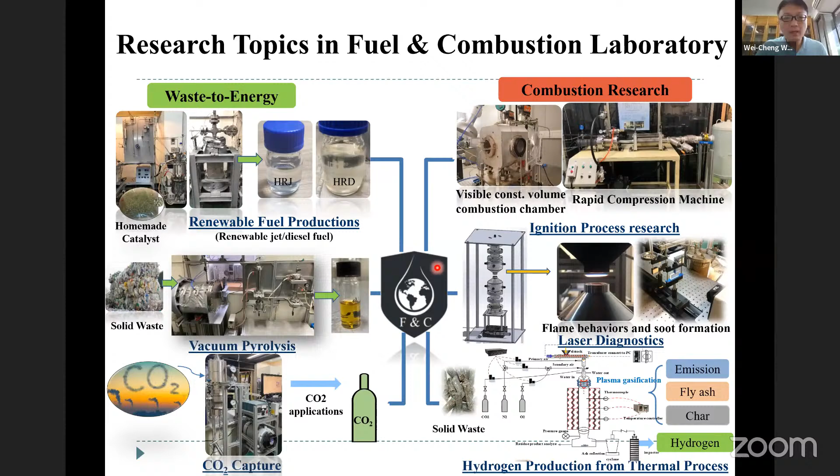So starting from our topic, net zero for aviation, which means you want to fly for net zero. This is a quite interesting topic because for the aviation sector, no one cares about carbon emission because it's on the sky. I mean, everything on the sky is not our business. So on the ground, transportation like trucks, cars, industrial boilers, we look at very seriously the carbon emission, but the sky, the aircraft, nobody cares.

So that's why there should be someone taking care of the carbon emissions for the aircraft. That's why I chose this topic. We call it fly net zero.

For fly net zero, the first thing we're trying to do is -- someone proposed electrical flight, and for small aircraft, for UAV, it's okay. But for big aircraft, I need more propulsion, I need more lift. The aircraft is like tons, very heavy, you cannot use electrical. Somebody proposed hydrogen, but the technology is not very mature now.

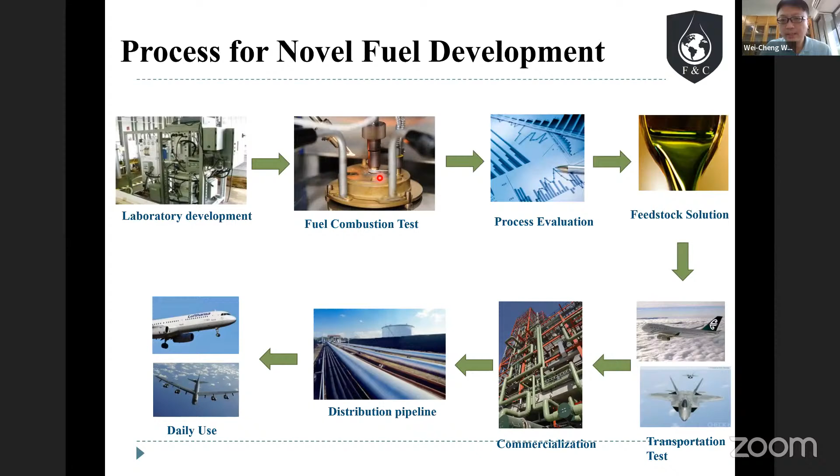Okay, once again, go back to our process. For today's presentation, what I'm going to present is the first 3 steps, because I only do the first 3 steps. No one can do it all, okay? No one can do it all. So I only do the first 3 steps, and I will start from the first one, then second one, and third one. Okay, let me start from the first one.

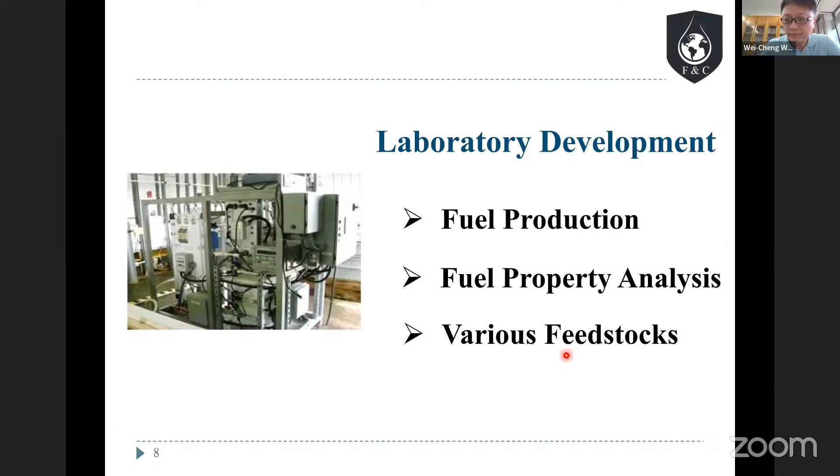Which is the laboratory development. For laboratory development, what I want to discuss is, number 1, how am I going to produce the fuel, the clean aviation fuel, the new novel jet fuel, and how do I find out the property of the fuel I produced, from the various feedstocks, various sources.

So let's look at the components of the fuel. The gasoline you've been using contains this kind of components. For diesel fuel, it contains this kind of components. But for jet fuel, it has 2 types of jet fuel.

If you look at Jet A1, it is for commercial airplanes, like this. But you also have to look at JP5, or sometimes JP4, there's also JP8. Jet Propulsion 5 is for military aircraft. So for these 2 types of fuels, most likely they have these components: alkanes, isoalkanes, alkenes, acetylene, cycloalkane, and aromatics.

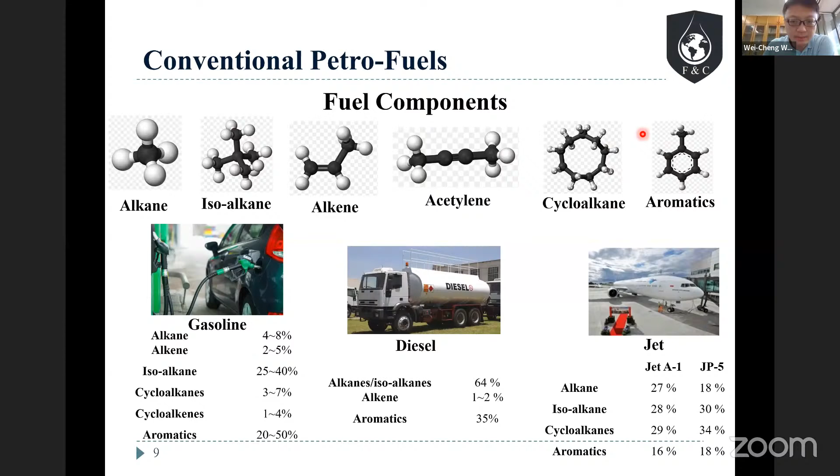Okay, so for jet fuels, you can compare to diesel. For the specification, we have to look at acidity. Aromatics has to be 25%. Sulfur content maximum is 0.3. Final boiling point 300. The flash point especially has to be 38. It has to be 38.

Flash point is the temperature when it reaches, for example, 38 degrees, you will flash. Density and freezing point has to be -47, which means you have to go lower than -47 maximum. Viscosity is 8, and heating value 42.8. Smoke point is 25, and cetane number is not available.

Because for jet fuels, I think previously no one considered their ignition, so they don't really care about the ignition of jet fuels. So for cetane numbers, normally they don't really look at their cetane numbers. Okay, so these are our targets.

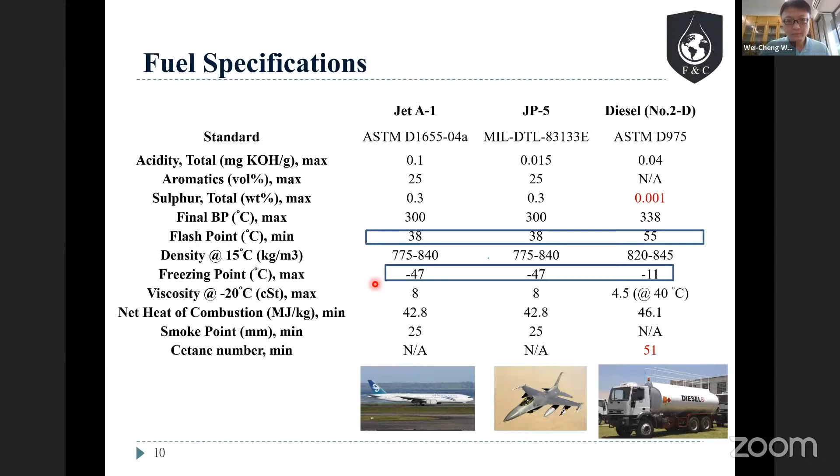And it goes through some processes: hydrogenation, hydrogenolysis, deoxygenation. I remove my oxygen, and it produces the straight chain alkanes. Then it goes through some isomerization, aromatization, or cracking. I can produce the alkanes, isoalkanes, and cycloalkanes. And after some distillation separations, I can make my jet fuel. I can make my jet fuel here.

And this jet fuel, I give it a name because it's from hydrogen, so start from H. It's renewable fuel, so R, and it's a jet fuel, so J. So I call it HRJ. Okay, so these are our processes.

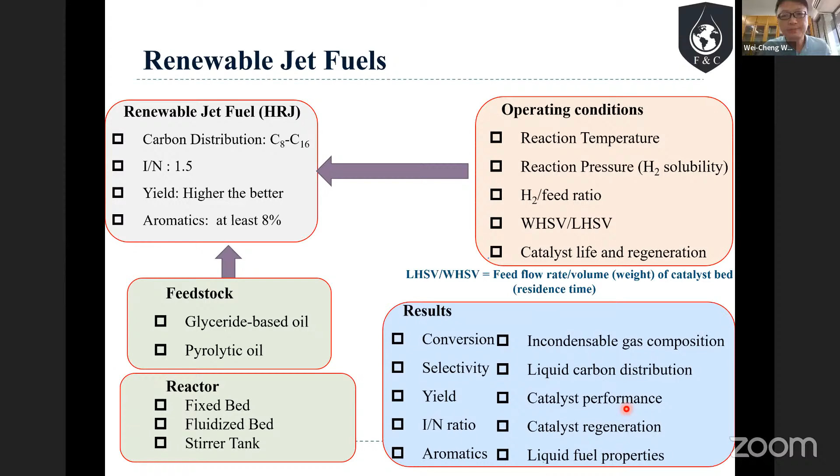So these are the GC diagrams we produced. The first GC diagram is the HRJ, what we call HRJ, the novel jet fuel we produced in our lab. So this HRJ, we can see from C8 to C17. Compared to JP5, which I mentioned previously, it's jet propulsion 5, used in military fuel. And Jet A1 is a commercial fuel used in commercial aircraft.

So you can see we have a little bit of C8, and also we have some heavy products, because the HRJ, the renewable fuel, is not coming from crude oil, so it would have some heavy products for sure. So we can always cut it off. I can cut it off right here or cut it off right here. I can make my HRJ similar to JP5 and Jet A1.

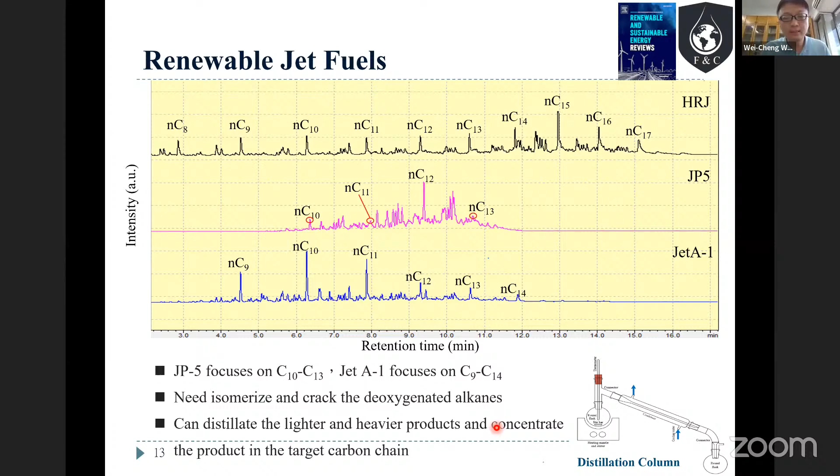I can also blend it. I can also blend my HRJ into JP5 or Jet A1, so it will fit. It will dissolve and it will fit. So we can distill off the heavier products and concentrate the product in the target carbon chain. So what are going to be the properties?

The properties in terms of density, viscosity, heating value. So we compare our fuel, once again HRJ, hydroprocessed renewable jet, to Jet A1, the commercial aircraft fuel. You can see the density is similar. Viscosity is a little bit low, but it should be acceptable because the maximum is 8, which means lower than 8 is acceptable. Heating value is higher, which means our fuel will give more energy.

Sulfur content is less than 1, which is good for the environment. Total aromatics, we are 8, and the maximum is 25, and 8 is already appropriate for the new regulation for SPK. Cetane number is 55.9 compared to Jet A1 at 45.4, which means our fuel is easier to ignite, which is good. And flash point is 64, compared to Jet A1 at 48, which means our fuel is safer for transportation or storage. And smoke point is 62.

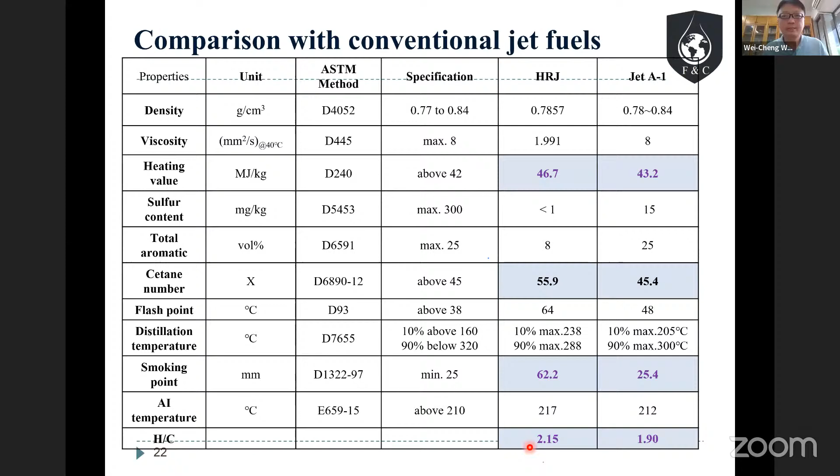And the last one, which is quite an important one, is the hydrogen to carbon ratio. Our hydrogen to carbon ratio is 2.15, compared to jet fuel at 1.9, which means the hydrogen content compared to the carbon content is higher. What does that mean? It means we are going to have better combustion properties. Later on, I will discuss this.

So for the co-product produced with our HRJ, hydroprocessed renewable jet, we call it renewable diesel, or HRD, hydroprocessed renewable diesel. So we also compare this to traditional diesel fuels, petrol diesel and biodiesel, in terms of cold flow properties, which means the cloud point. Our diesel fuel is -20, biodiesel is -5, and normal diesel is -12. So our HRD is better.

In terms of heating value, right here, the heating value is also better compared to biodiesel and diesel. Cetane number is right here. Our cetane number is 77 compared to biodiesel at 47 and normal diesel at 53. Our diesel is better, which means it's easier to auto ignite.

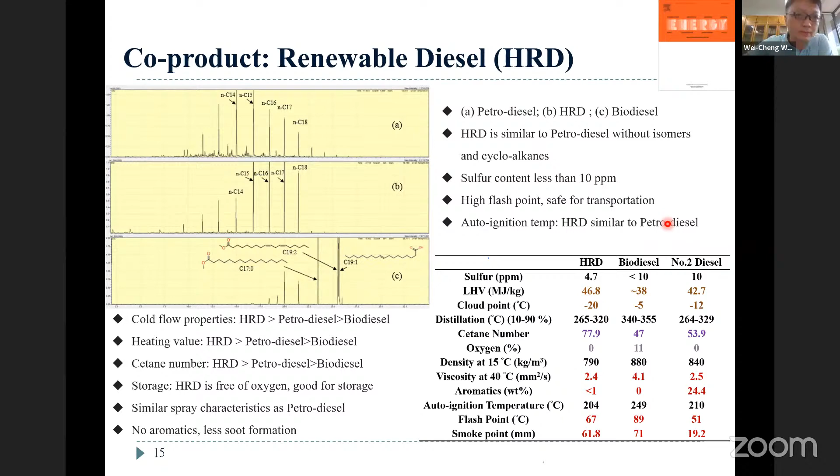Okay, and there's no oxygen, good for storage, and similar spray characteristics as petrol diesel, no aromatics, so no real concern about soot formation. So these are the good things for this co-product. And the better the co-product, the lower the cost. Because if the co-product is good, then we can sell it. When we are producing it, we will have more buyers for our HRD, which will bring down our cost, right?

So when we are trying to produce jet fuel, renewable jet fuel, we start from what we call HDO. What is HDO? Hold on. Okay. What is HDO? HDO is this. When we deoxygenate it, remove the oxygen, we will have the straight chain alkanes, and this we call HDO. So we start from HDO, the straight chain alkanes.

And then we do different temperatures, different pressures, and different residence times, and we see the carbon distribution. And this is quite important. Why? Because later on, I will introduce our combustion studies. Once the combustion studies tell us what kind of carbon range we want, we just tune our temperature, pressure, and residence time, and we will get different carbon distribution. Then I will get better combustion characteristics. So that's how the fuel producer works with the combustor designer.

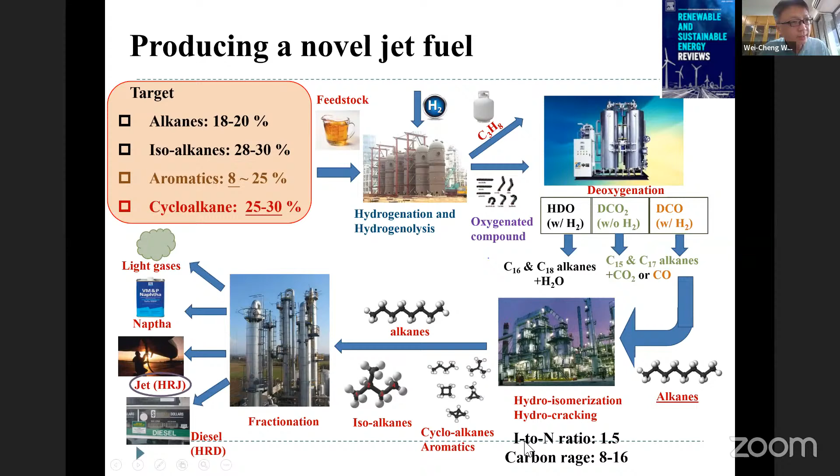I can change my fuel quality property. I can change my fuel component, and then I get different combustion characteristics. So we look at different carbon distributions. Let's go back. If we start from straight chain alkanes, we need to go through isomerization and cracking, because I need to make the carbon range located at 8 to 16. Also, I need to have more isomers to make the I/N ratio 1.5. So I need to do isomerization and cracking.

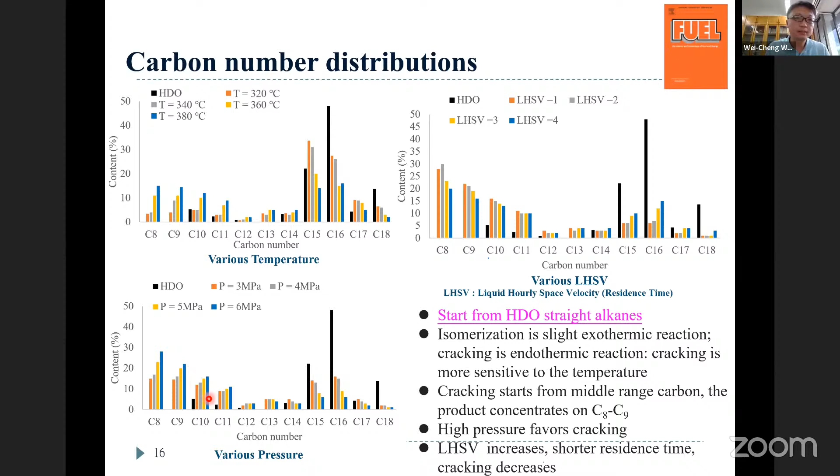Isomerization is a slightly exothermic reaction, so it will emit heat, and cracking needs to absorb heat. So they are different reactions. And cracking is more sensitive to the temperature, which means with higher temperature, you have more cracking. Cracking starts from the middle range carbon, so your product will concentrate on C8 to C9. Also, with higher pressure, you have higher cracking. That's what we found. With shorter residence time, you have lower cracking reactions. That's in terms of carbon distribution.

And then what about the I/N ratio? I think everybody still remembers what I said about our I/N ratio. The I/N ratio is better to be 1.5, no bigger than 2. So maybe this range for temperature, residence time, and pressure will be better. Because high pressure favors isomerization, if we give higher pressure, the I/N ratio will be higher.

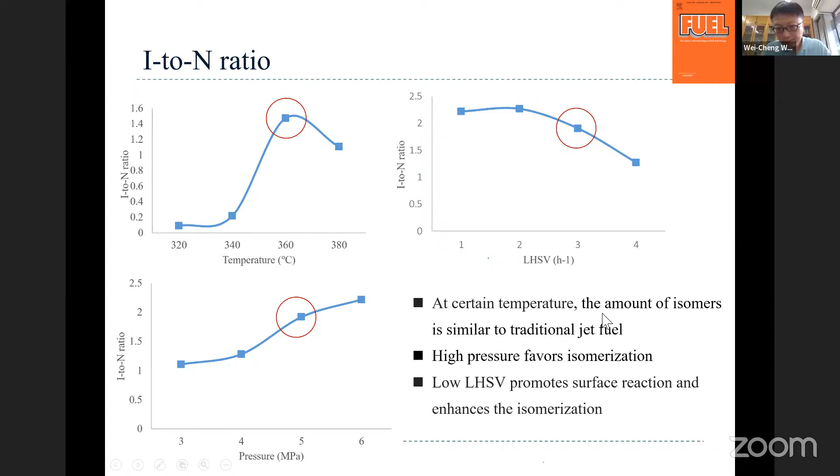What about lower? Lower is bad, because we need to maintain the flash point at 38. I think I mentioned before, we maintain the flash point at 38. So we have to have some isomers in there to maintain the flash point. Okay. And aromatic content, okay.

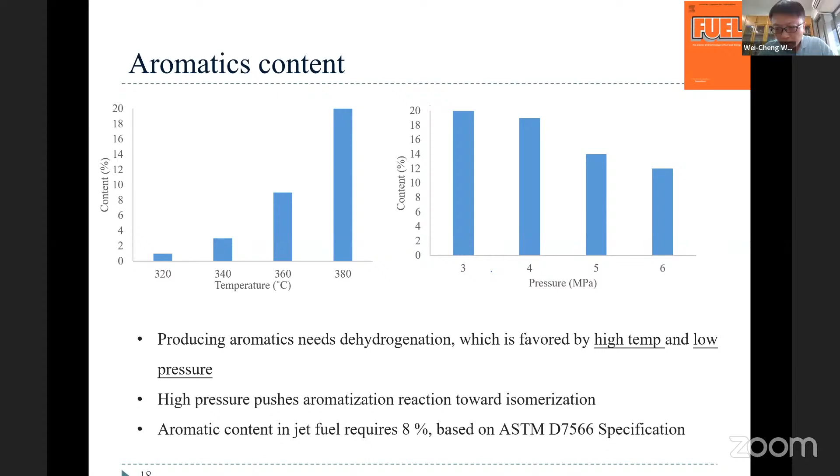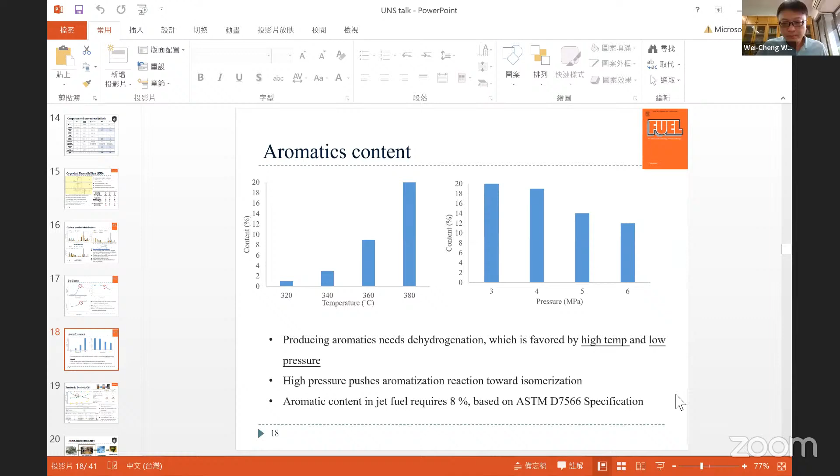Okay, so back to our discussion. As everybody remembers, we need 8% for the aromatics. And you can see if we have a higher pressure, the aromatics will decrease. If we have a higher temperature, the aromatics will increase, because producing aromatics is dehydrogenation, which is favored at high temperature and low pressure. So if you have a high pressure, it will move to isomerization instead of making aromatics.

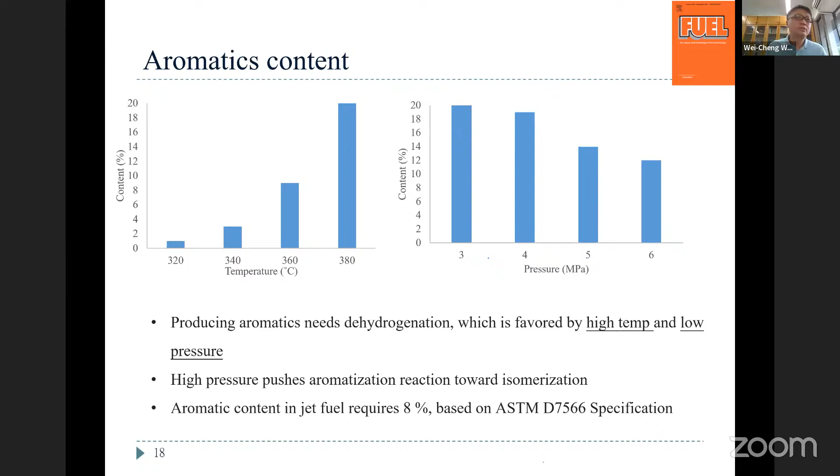And very important is why we need aromatics: for the fuel tank, you need to have the seal. So you need some aromatics to protect the seal. But we cannot have too much aromatics, because more aromatics, as we'll introduce later, will produce more soot, which makes our fuel not clean, even dirty. So we don't want to have more aromatics, okay?

We also try different feedstocks besides the glyceride-based oil. We try pyrolytic oil. The pyrolytic oil comes from waste-derived pyrolysis. So you can see the sulfur content is 0. Aromatics is 28, a little bit higher, so that's something we have to work on, to reduce the aromatics.

Vapor pressure is about 2.28. Molecular weight is similar to normal jet fuel. Hydrogen to carbon ratio is a little bit lower than normal jet fuel, meaning the hydrogen content compared to the carbon content is lower, which is not that good. So that's something we have to improve. Density is similar, viscosity is similar, and heating value is a little bit lower.

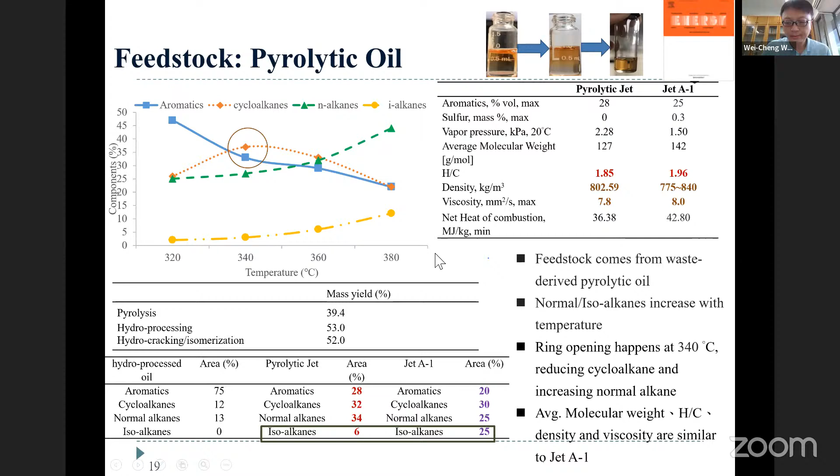So for waste-derived pyrolytic oil, the jet fuel is not produced very successfully, but that's something we are working on and can improve. So the next part we're trying to work on is the fuel combustion test. We do 2 types of fuel combustion study: one is the ignition delay, and one is the soot formation.

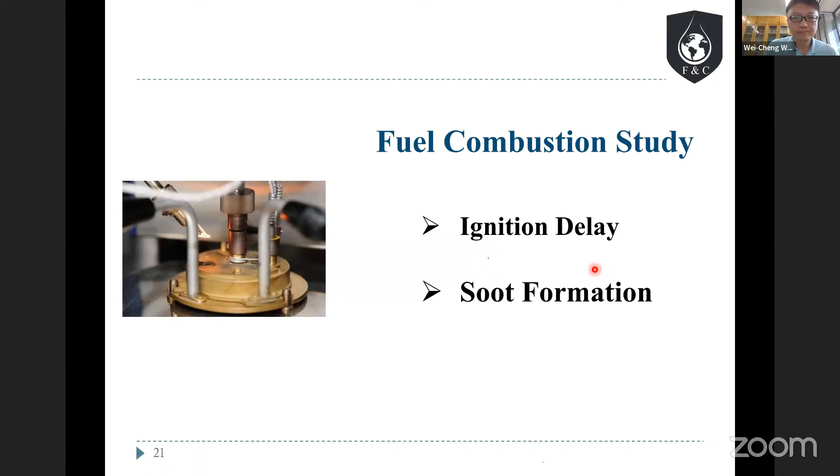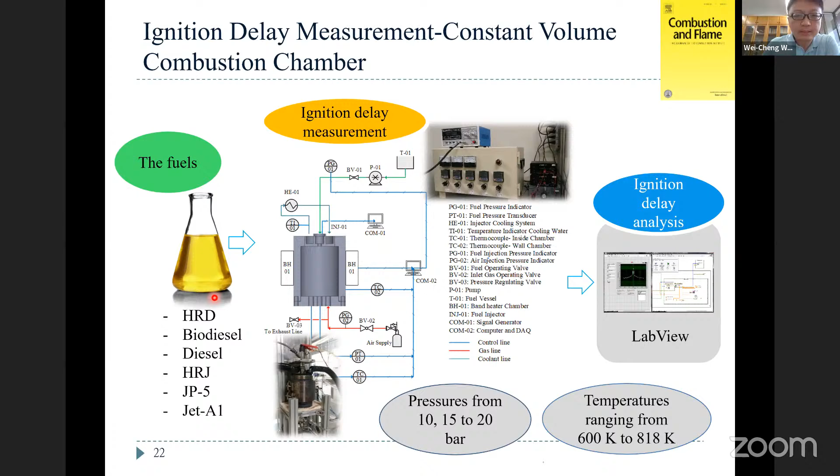For ignition delay, we use the constant volume combustion chamber, and we try different pressures, different temperatures, and different fuels. This is the constant volume combustion chamber in our lab. We want to look at the cool flame ignition delay. So what is a cool flame ignition delay? This is our cool flame ignition delay, tau 1. Tau 1 is the first stage ignition delay, which includes the cool flame ignition delay.

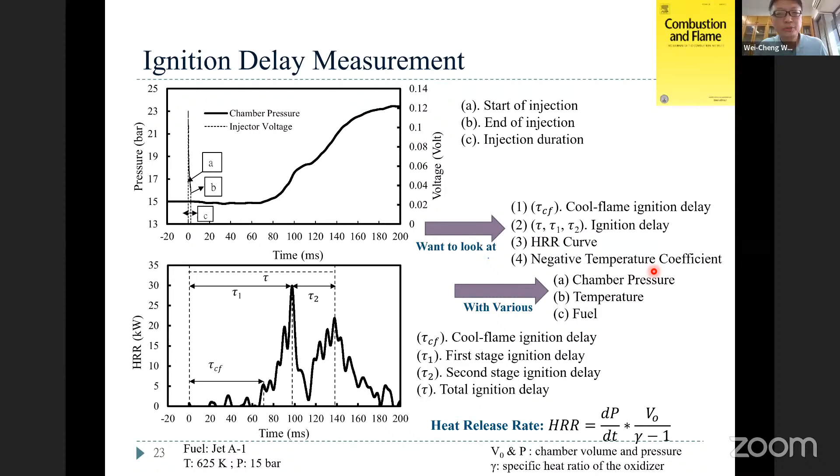We also look at the second stage ignition delay. The first stage and second stage ignition delays combine into our total ignition delay. We also want to look at how much energy is released, so we look at the heat release rate. So we look at cool flame ignition delay, first stage and total ignition delay, and heat release rate. Also, a very important thing is the negative temperature coefficient. So what is the negative temperature coefficient?

Nowadays, people doing combustion always want to do low temperature combustion. Why? Because with low temperature combustion, you don't need to worry about NOx. So this is the low temperature auto ignition mechanism. People working on combustion should know that you need to look at chain initiation, then chain branching, and at the end chain termination.

But the two most important routes we look at are, number one, what we call H abstraction, which means during combustion they're trying to grab the hydrogen atom and combine it to produce maybe HO2 or something like that. So the ability of H abstraction is very important. The other one is isomerization. These two mechanisms are very important for the low temperature ignition mechanism.

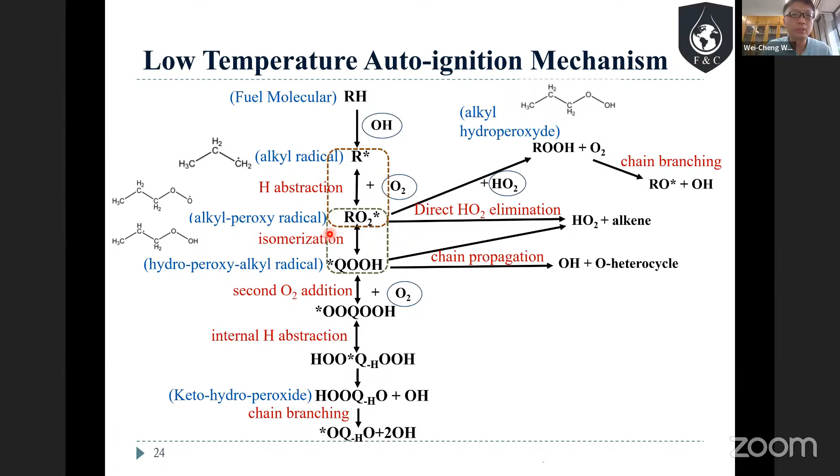However, in the intermediate range, the ignition delay will jump up a little bit, which is a very interesting part. The activity at the intermediate stage will decrease, which means the ignition delay will increase a little bit. That's something people want to look at: why is that, and what happens if I test different fuels? Okay.

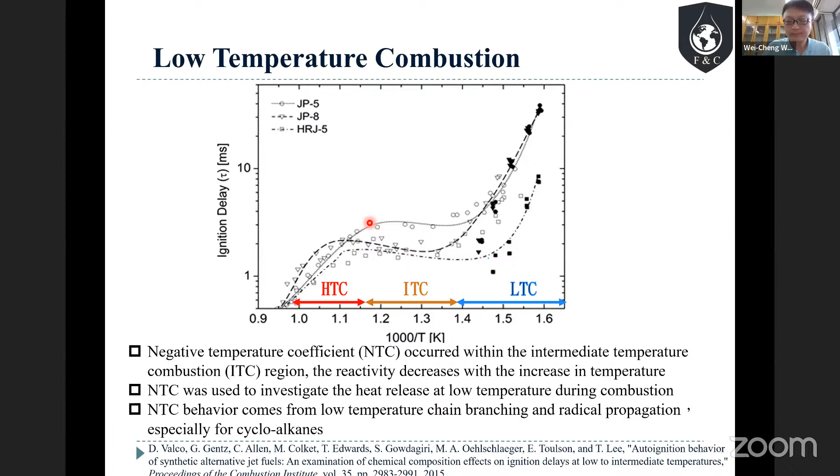So this behavior comes from chain branching and radical propagation, especially for cycloalkanes. Actually most fuels have cycloalkanes, and fuels with cycloalkanes all have phenomena like this. Okay, so we try to look at the total ignition delay. This result we published in Fuel.

The total ignition delay decreased with the increase in temperature, that's for sure. It also depends on, like I say, H abstraction and isomerization. And the size of the carbon-hydrogen bond influences the stability of the H atom abstraction, especially if you have a higher hydrogen to carbon ratio. Then go back to our previous discussion. We have the hydrogen to carbon ratio.

This is what we want to look at. At low temperature, this part is low temperature, you can see the new fuel we produced is much lower than JP-5 and Jet A-1, the traditional jet fuel. This is the new fuel. This is the traditional fuel. So at low temperature, we have a lower ignition delay, which means our ignition is better, much better at low temperature.

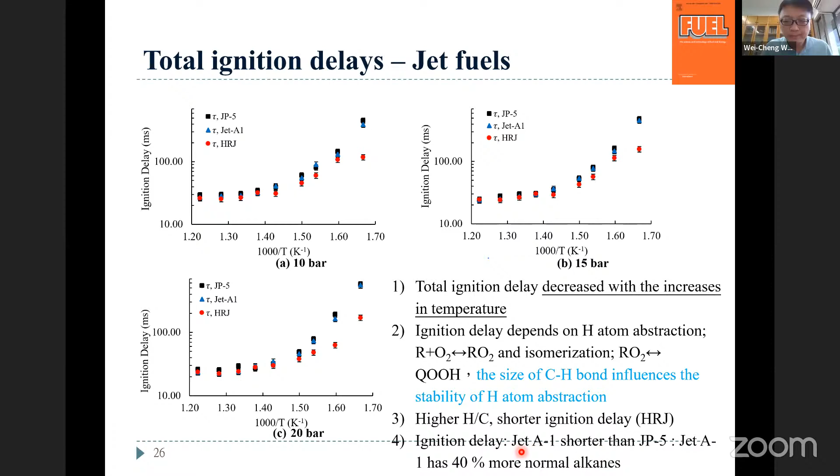So that's the cool flame ignition delays. And why we study cool flame ignition delay? Because for cool flame ignition, you need more energy released to compete with the heat of vaporization. So we want to look at which one provides higher specific energy during the chain initiation process. Then it will overcome more energy for heat of evaporation. So this one is better for cool flame ignition delays.

So anyone with a higher hydrogen to carbon ratio will give more specific energy to overcome the heat of vaporization. It will release more heat, will produce more heat to overcome the heat of vaporization. Then it performs better for cool flame ignition, right?

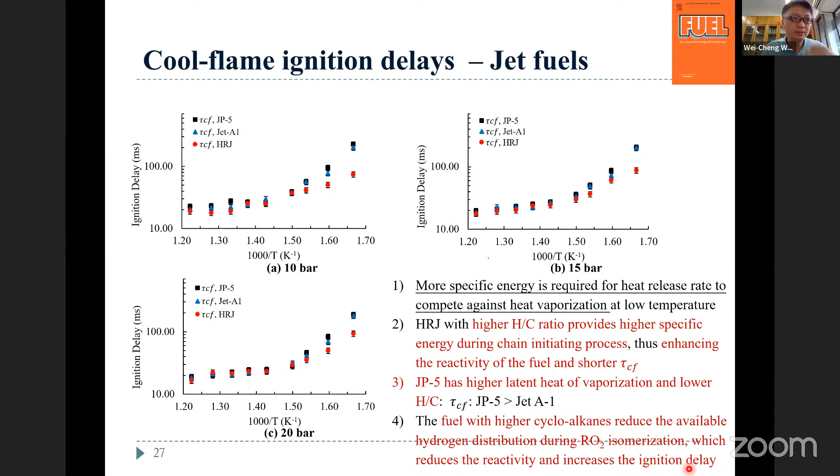And also, what we want to look at is if you have higher cycloalkanes. Traditional fuels, gasoline, diesel, or even jet fuel, have long had cycloalkanes. So it will reduce the available hydrogen distribution, which means during the chain initiation, you don't have availability of hydrogen. It's not easy to grab the hydrogen from you, so you don't have a good hydrogen abstraction. That will reduce the reactivity and increase the ignition delay, which means this fuel is not very active.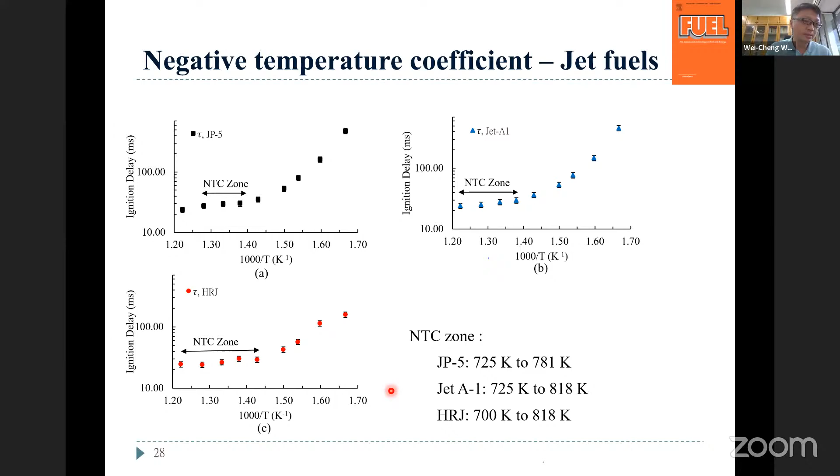Okay, and we look at the negative temperature coefficient. Like I say, there's a slight increase in the ignition delay. For JP5, Jet A-1, and HRJ, they have a specific range for the negative temperature coefficient. So that's the ignition. And also we look at the soot formation.

Soot formation. So this is our setup for the counterflow burner, and we use the laser diagnostic we call laser-induced incandescence technique through our counterflow burner. And we use these two equations for calculating the soot volume fraction. Also we use thermophoretic sampling. What is that? We use a probe.

There's a probe driven by a pneumatic cylinder with a piston, and the probe will be inserted into the flame. The probe has some mesh at the top, and the mesh will catch some soot. Then we take the soot on the mesh to the TEM, transmission electron microscopy, and we test the particle size of the soot.

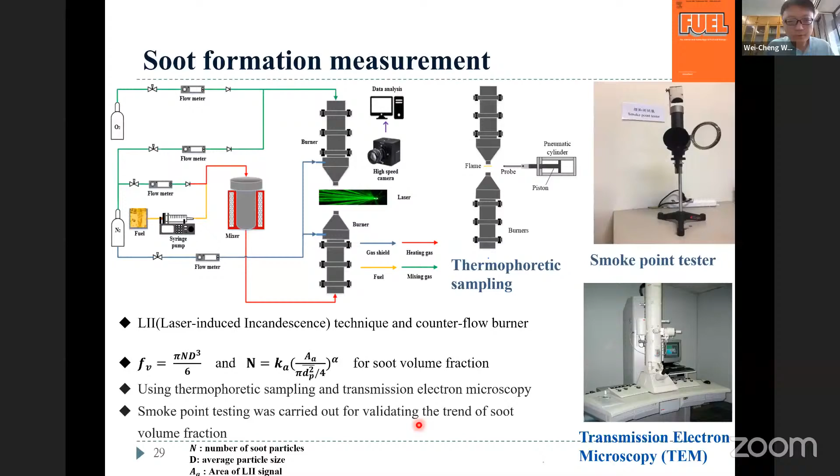And also, the number 3 experiment is we use the smoke point tester. This is the smoke point tester. We use this to test the smoke point, because the smoke point has a different trend from the soot volume fraction. You have more soot, you have a shorter smoke point. You have a longer smoke point, you have lower soot. So we're just trying to validate the trend of the soot volume fraction.

So this is our result. You can see this is a fuel we produced. Once again, this is the hydroprocessed renewable jet. You can see that in terms of soot volume fraction, it's much lower than the traditional fuel, which means when it burns in a jet engine, you produce much less carbon, much less smoke, compared to the other two

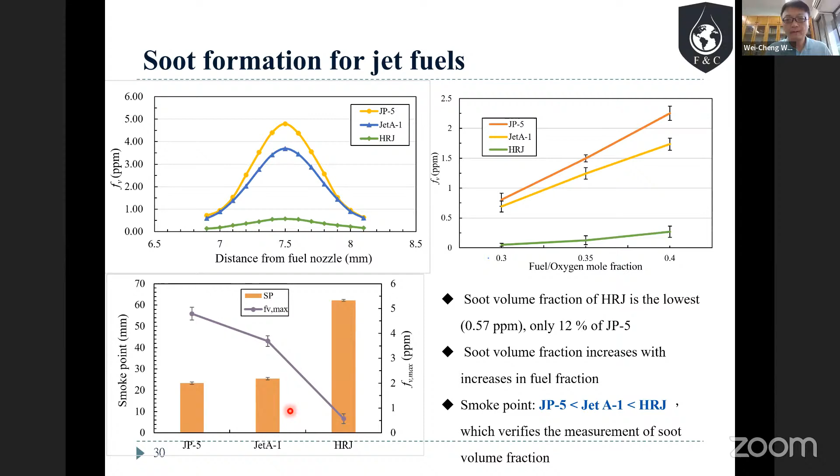fuels. And also we look at a different fuel oxygen mole fraction. The trend is the same. We also look at the smoke point. You can see our fuel has the highest smoke point, so it has a lower soot volume fraction. And JP5, which is used in military, compared to the fuel used in commercial aircraft, Jet A-1, they are quite similar.

And also when we look at the literature, the soot formation for normal alkanes is less than isomers and cycloalkanes, which means if you have more isomers, the fuel is more dirty. If you have more cycloalkanes, the fuel emission has more soot, it's more dirty. Also if you have more aromatics, the fuel is more dirty as well because it has higher soot.

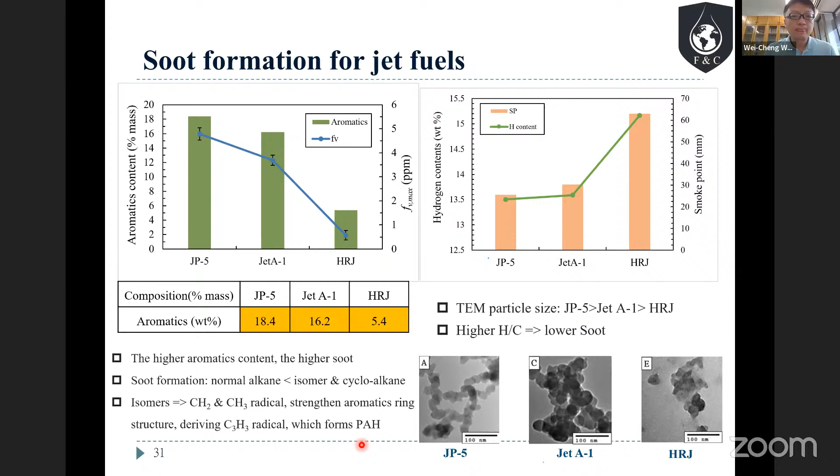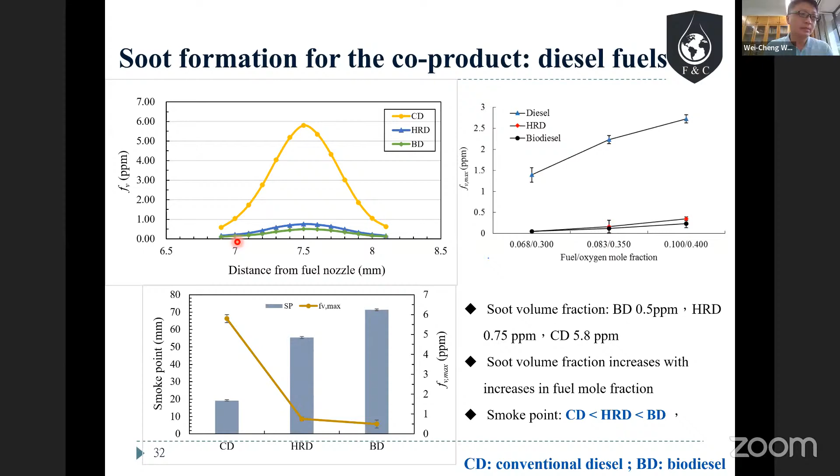So we also look at their TEM image, and this is the image for our diesel fuel, and this is biodiesel. So in terms of soot formation, once again, the alkane is lower than cycloalkane, lower than aromatics. So aromatics produce more soot, and then cycloalkane, and then normal alkanes.

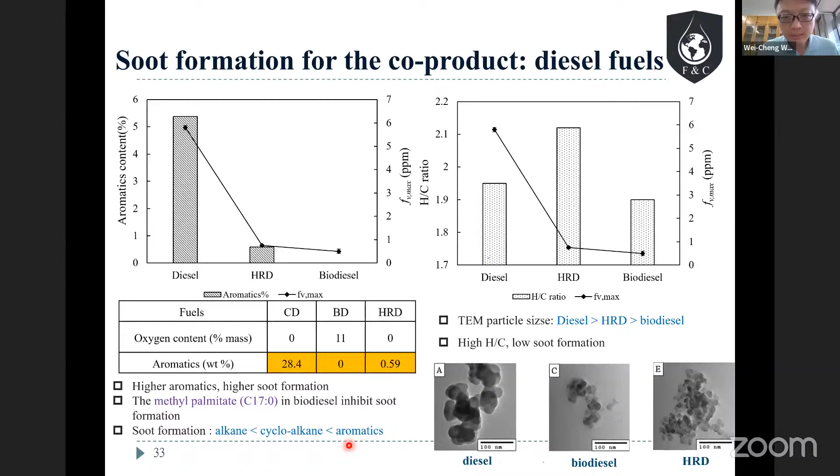So this is the combustion study for our novel fuels. The production is okay, the combustion test is okay. Then if we want to commercialize this type of fuel, what should we do? Like I said, we need to satisfy at least 3 aspects. Number 1 is energy. Number 2 is economics. Number 3 is environment. So for this process evaluation, I will introduce our energy and exergy analysis for looking at the energy for the whole process.

And also I will introduce what they call techno-economic analysis, which means throughout the whole process for producing the new fuels, what is going to be the cost and what is going to be the price if you want to sell it. All right, so this is our process evaluation. We have 3 sources: number 1 is the feedstock compositions. Number 2 is the process operating conditions. Number 3 is the laboratory results, what kind of conversion you have, what kind of selectivity you have.

Of course, if you scale up, the result will be different from producing a little fuel versus a large amount of fuel. But it takes some time to scale it up to get a pilot plant. But based on the laboratory results, we can produce a process model through our software, and then we do the mass and energy balances, and then do the cost analysis, and the cost analysis is based on the discounted cash flow analysis with the capital and operating costs.

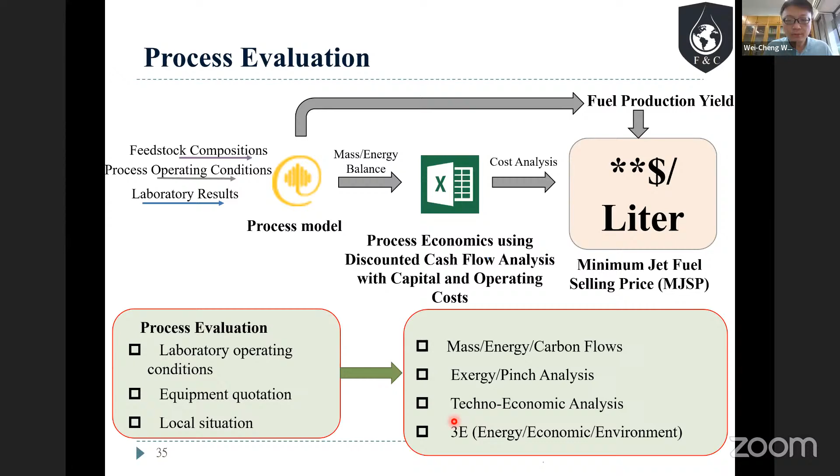So you can define your exergy destruction. If you go to the thermodynamics chapter 8, the middle of the chapter will tell you what the exergy destruction is, and which unit has the exergy destruction.

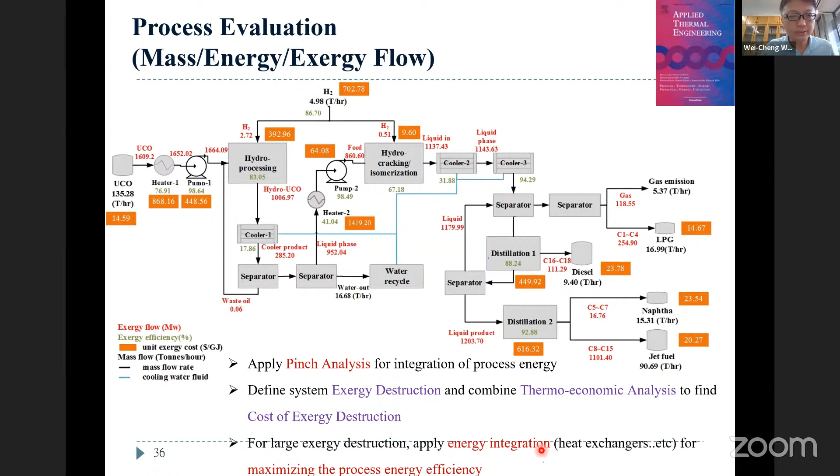And then this is the energy part. For the economic part, we apply the techno-economic analysis. This is our process model. We get a vendor quotation for capital cost, a local evaluation for operating cost, and throughout the cash flow analysis, based on some assumptions, we can calculate the reasonable unit price of the product.

What is our product? Jet fuel. What is going to be the new reasonable product price that will scale? I can have a reasonable scale and make a reasonable profit for this type of product. So based on our publication in Energy, our MJSP, which is minimum jet fuel selling price, the reasonable unit price for our jet fuel is $1.43 US dollars per liter.

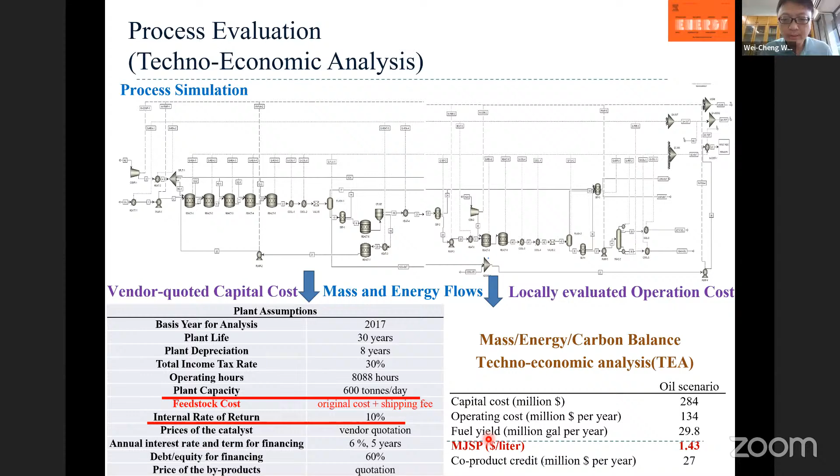Okay, what is going to be the factors that affecting the prices? We call this a tornado chart because it looks like a tornado. The longer the bar, the higher impact for the unit price, for the benefit, for the cost. The shorter, the less impact for the unit price, for the cost.

We also look at the capacity. The bigger the capacity of the plant, the cost will reduce, which means your unit price will reduce. So the higher the plant capacity, the lower the cost. But after a certain amount, for example 3,000 tons per day, it will be flat, which means it will no longer affect that much.

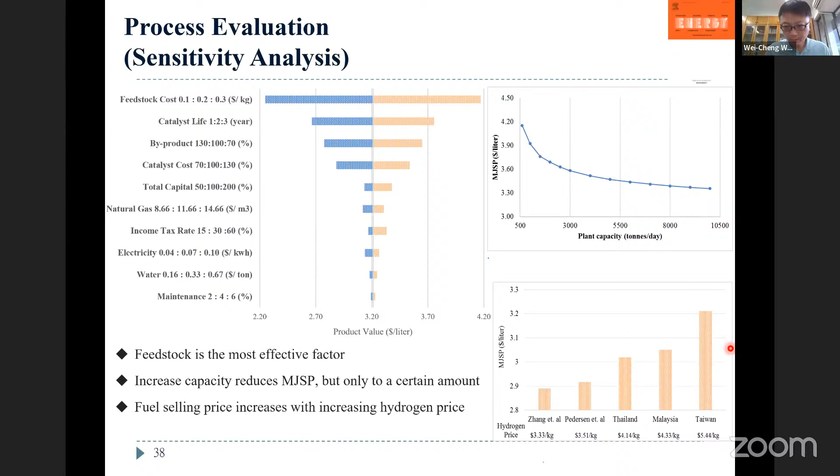And we are using hydrogen for producing fuel, so the higher price of hydrogen, the higher the cost, right? And also we look at the operating conditions.

When we produce the fuel, we try different temperature, different pressure, different ratio, which I call the equivalent ratio, because if you compare to combustion, hydrogen is like the oxygen, oil is the fuel. So hydrogen to oil ratio is like equivalent ratio. Compared to the equivalent ratio and the residence time - different residence time, different temperature, different pressure, different equivalent ratio - you will have different costs, so you will have different reasonable prices.

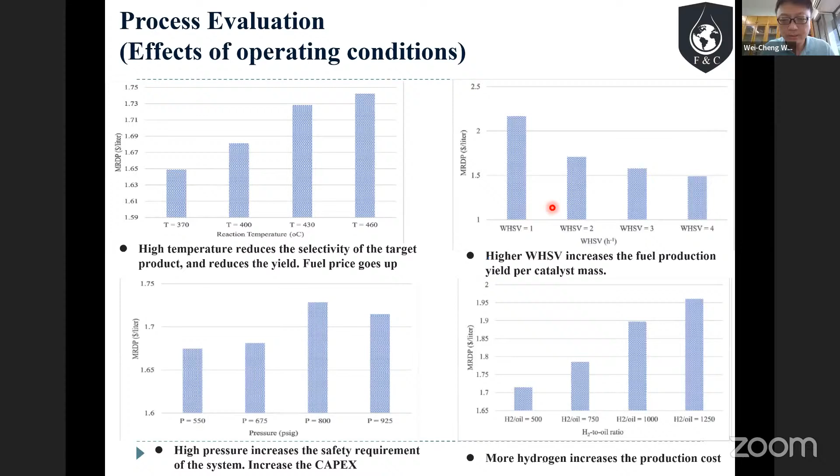So this is my conclusion. Back to our steps - like I said, for this talk I only talk about 3 steps. Actually, I only work on these 3 steps as well. The other steps are not out of my scope... actually, they are outside my scope.

For the first step, the current progress is we do the novel fuel development, and in the future we will try to do some decarbonized fuel. For example, we will try to produce hydrogen, or we try to use CO2 to produce a fuel. That's also a topic for novel fuel production.

And also for the combustion study, we can also do work for our renewable jet fuel. We can try spray atomization, we can try flame speed, we can also try engine operation. These are things we can do in the future.

For process evaluations, we model the process and get a model for the process. We do energy and exergy analysis and economic analysis. There's one more we didn't do, we missed, which is environmental analysis. So energy, exergy, environment, and economics - we call this 4E. 4E plus R, we call risk. Some people are doing the 4E process, this 4E plus risk R, so 4E plus R.

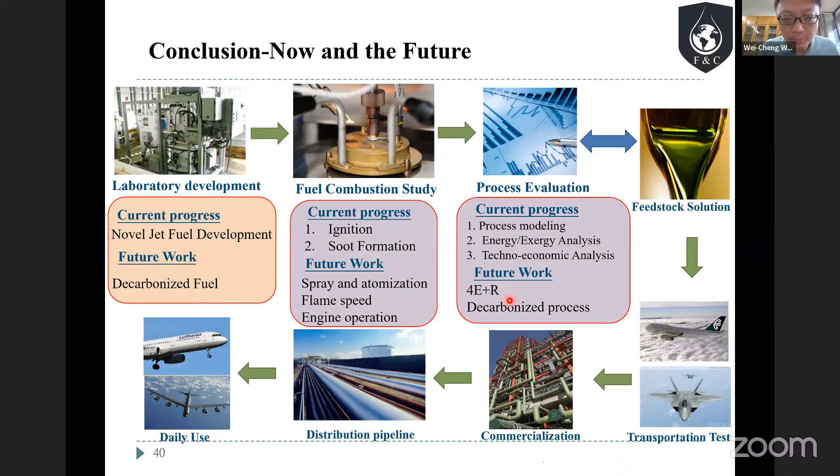Also we might want to model some decarbonized process. So this is my talk, and thank you for listening. If you have any questions, please let me know, I'll be happy to answer.